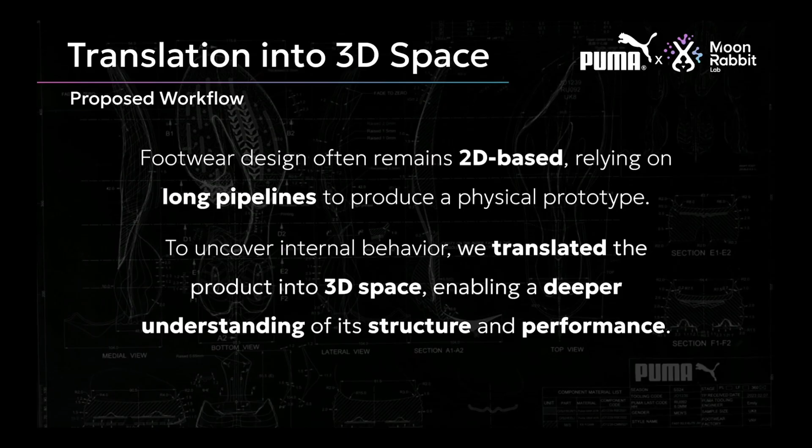I don't know how many of you have worked in the footwear industry, but every time they start from 2D. This was quite different for me, coming from an engineering background; starting from 2D was weird. So we wanted to start with a 3D approach immediately, to start seeing digital mock-ups, creating prototypes, forms, shapes, design, and so on. So we proposed a way to translate the previous model into a 3D design space and create characteristics to understand the structure and performance.

Besides that, we wanted to bring in the part that we master, because I've spent six years working only on simulations of hyperelastic materials, soft foams and rubbers. So how can we create a multi-material simulation that enables the understanding of footwear in general? We can observe the physical behavior, like an X-ray or a macro vision of what's happening in maybe 250 milliseconds.

So we proposed a workflow. This is really interesting, because for us it's always about the workflow and how these workflows not only apply to footwear but can extend to different industries. So how did we do this? We started by collecting data. Puma has a NITRO lab in Boston with a really cool setup where you can get plantar pressure distributions, treadmill videos, and ground reaction forces.

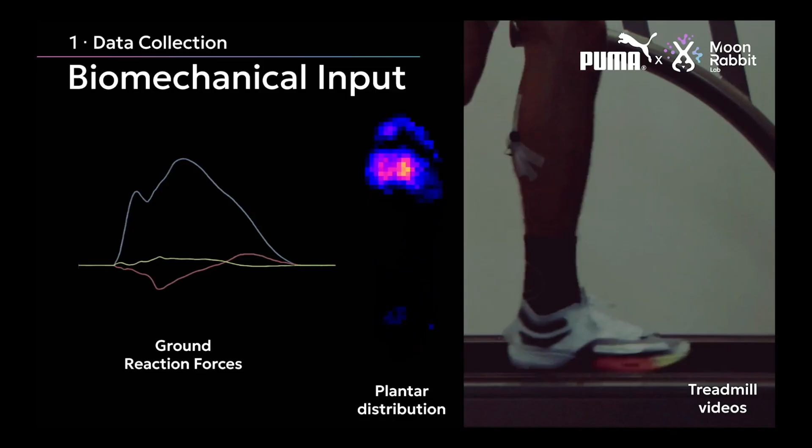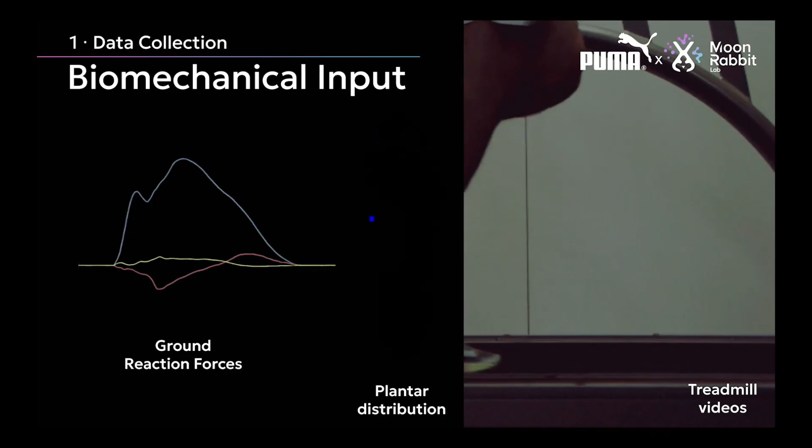So how can we put all this information together? In the end, it's data trying to talk with the product. One way to do it is by experience. The other way is to put all the data in a design space. So we started creating a huge database, inviting runners and adding more information to create enough statistically valid data that could help us lead the design.

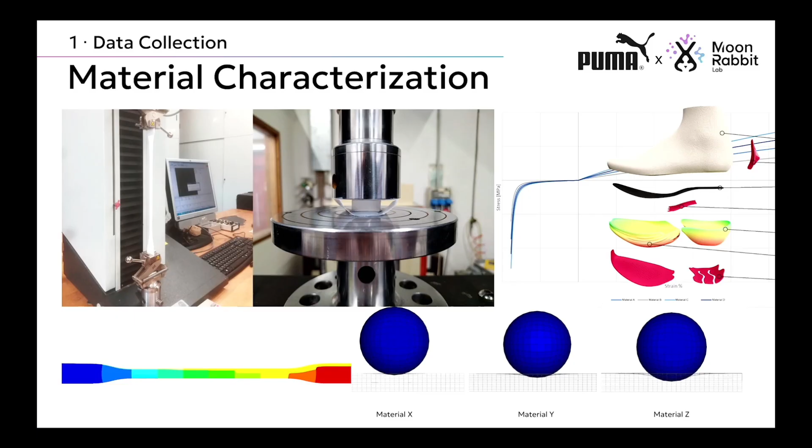One of the main things I believe is important in design engineering projects is material characterization. You need to know what you are working with: whether it's hyperelastic, plastoelastic, or carbon fiber, and what the considerations are. You need to understand the tension, the compression, the actual behavior, and so on. This was really critical for us to set up a correct simulation.

And then we needed something or somewhere to put all this information in a 3D design space. So we got our inputs, then we created our computational data processing. So this is the space, or the black box, or our area in which we will start transforming data into 3D. And how can we visualize it? How can we actually work with that?

So this was the challenge for us, but in the end we started creating our own tools, because custom tools in this case were one of the key elements for creating what would be our performance area. We started creating clusters in Grasshopper with different definitions. We created our own API for FEA. We started creating different definitions and workflows for data visualizations, and this helped us to loop faster and faster between one area and the other.

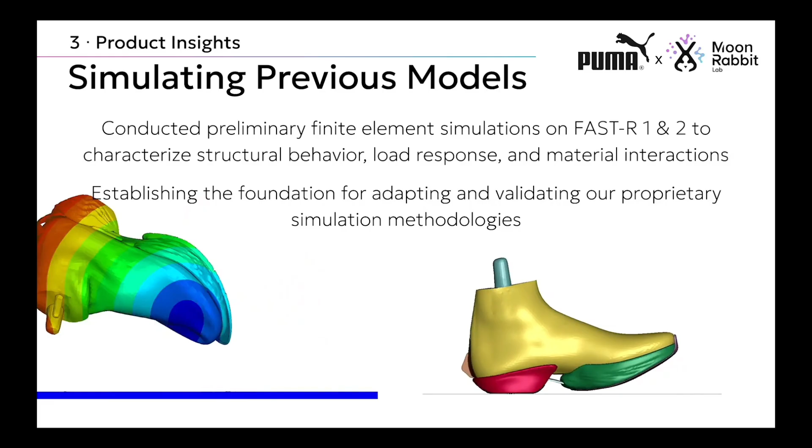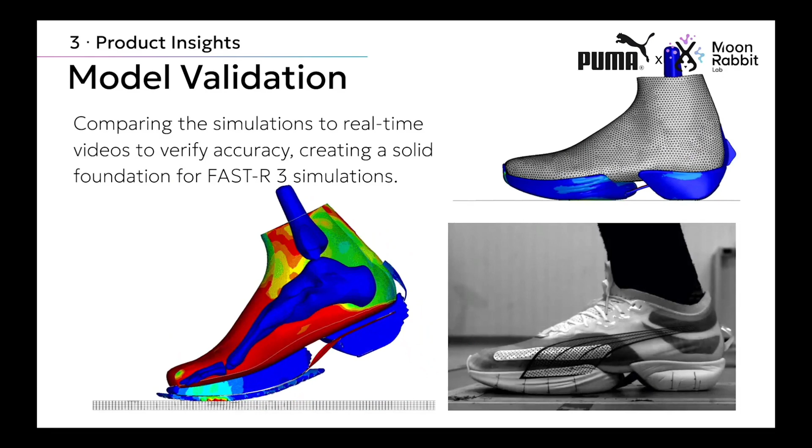So simulating multi-material physics was not an easy task. At the beginning it was really complicated to get it right. You need to understand what are the correct balances of forces, the timings, the materials, and so on. But finally we got it correct. And this is part of the success of this project, because we were able to validate the digital models with physical testing. So we knew the deformations, we knew the strains, we knew the forces, and this helped us to move forward believing what we were doing was correct.

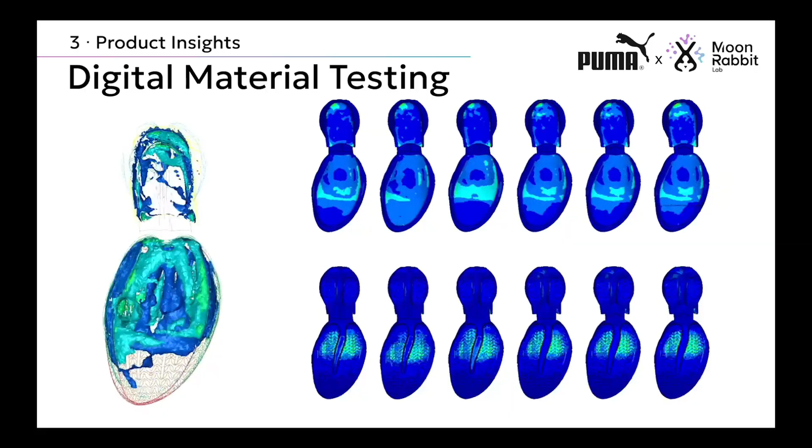So we started mapping. Digital simulation enables the creation of different geometrical changes at the same time that you can vary materials. So you can test different types of foam, different types of rubber, different types of internal plates, could be PAs, carbon, etc., and have everything digitally tested. So we proceeded to do that. We created a material testing with the same model of the Fast-R 2, and we started learning which materials were having the best response, the best timings, the best energy absorption, the correct bendings.

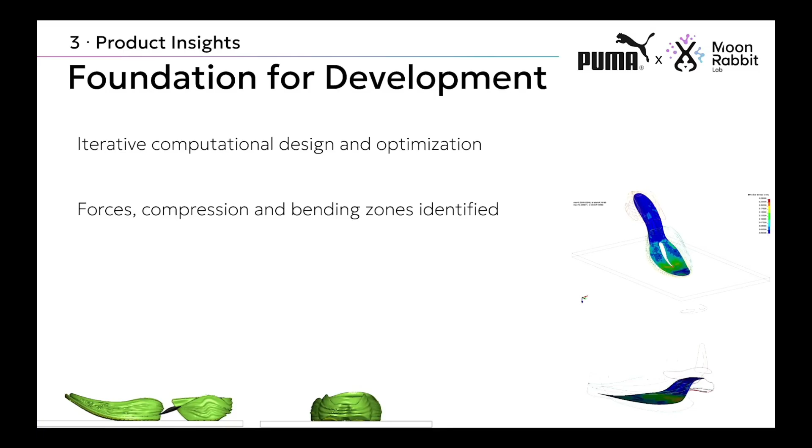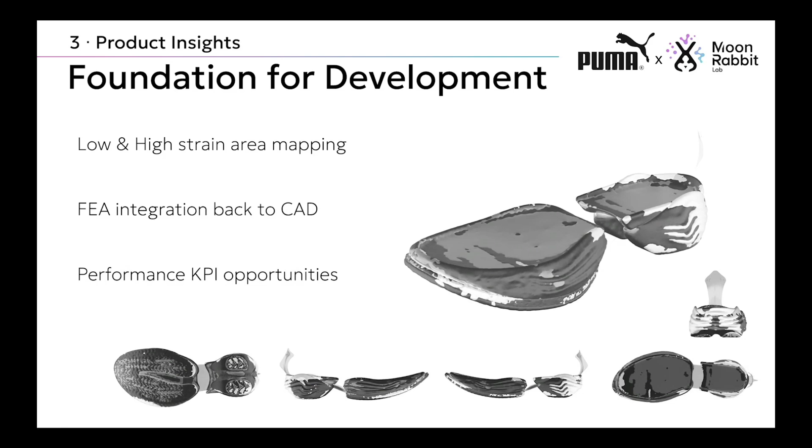And once we understood all of that, we put it all together in a way that we can actually use the information. So we started creating heat maps, volumes, and our own KPIs in order to understand how we can use this information to make an informed decision in design.

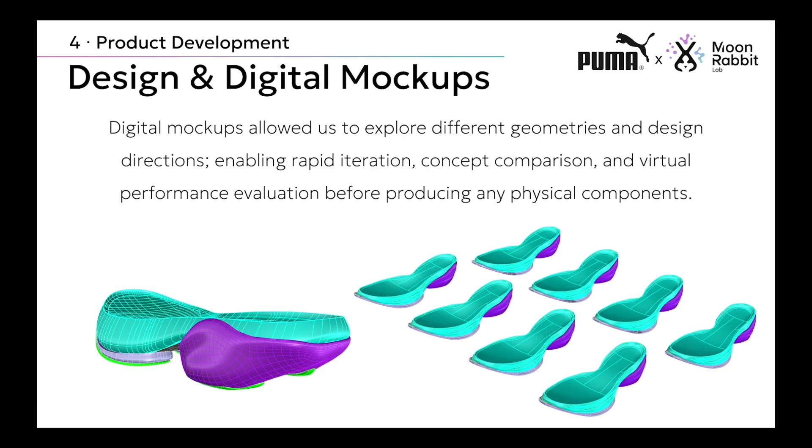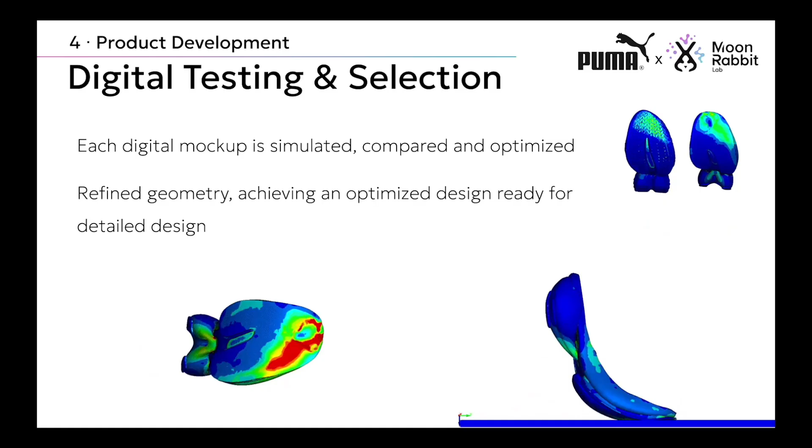The next step for us, I think, was the digital mockup. Digital mockup was really important for us, because of the possibility to create fast prototypes in terms of days, maybe weeks, test it, and go back and forth once again. So that was the key element that we started implementing. Once we had the information from the Fast-R 2 guiding the design of our digital mockups, we were able to also simulate those digital platforms. So we could understand if our designs were making sense or not, and where the areas of opportunity were to improve compression, improve stress, or better guide the directions of forces.

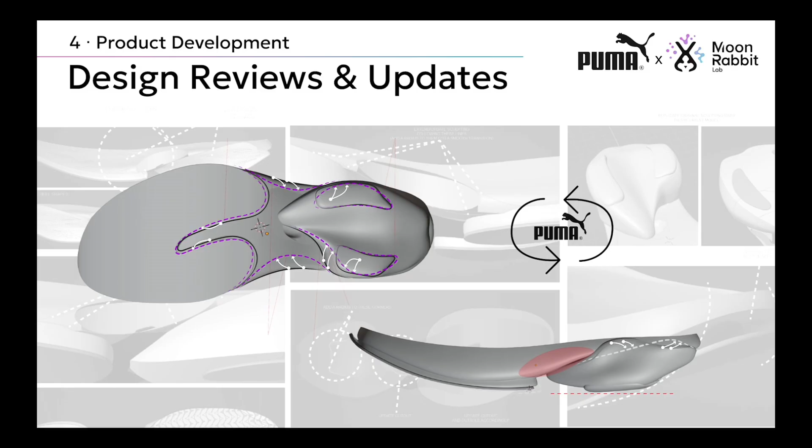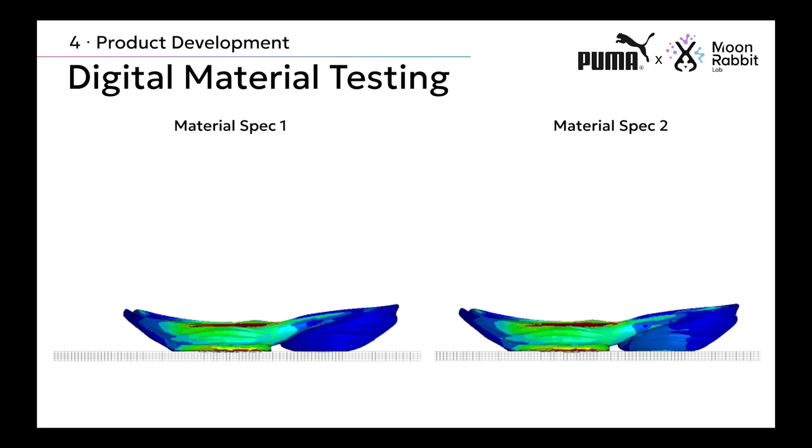Along with this, it was always important to have the DNA, or the design part, inside the project. So this was a key feature in which you start creating the mockups, but then you start aligning the design. So everything comes together: the engineering part, the design part, and the production side. Little by little we came up with the first sample design, and then we started iterating between different material specs. Here we were under the microscope, literally. We started creating different specs, different forms. The changes were minimal, but we knew that we wanted the maximum performance. So how can we actually achieve the best performance in each piece?

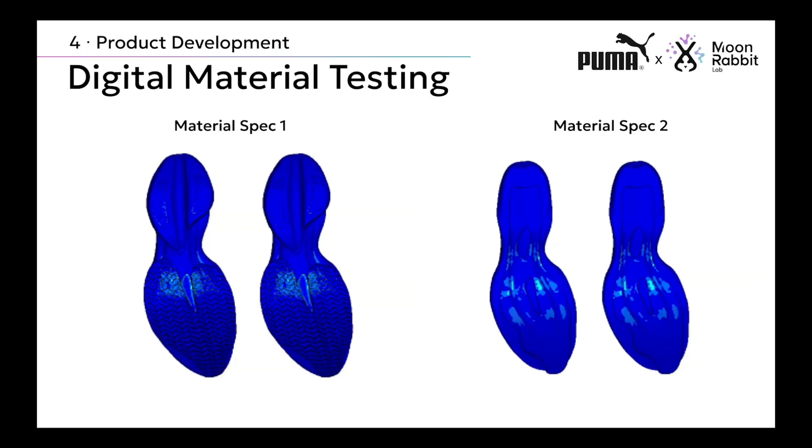What was the correct material to enhance the performance of the carbon plate, in order to guide the energies in the correct directions? What were the foams? What were the rubbers and the patterns inside the rubber that enabled the best traction? So all of this was possible to be tested through simulations and digital testing.

One important thing for us was always the weight, but at the same time keeping the DNA of the brand. So that's why we always kept in mind how the shoe is constructed, what's the storytelling that is coming through, and how we can actually create a shape or a design that follows this.

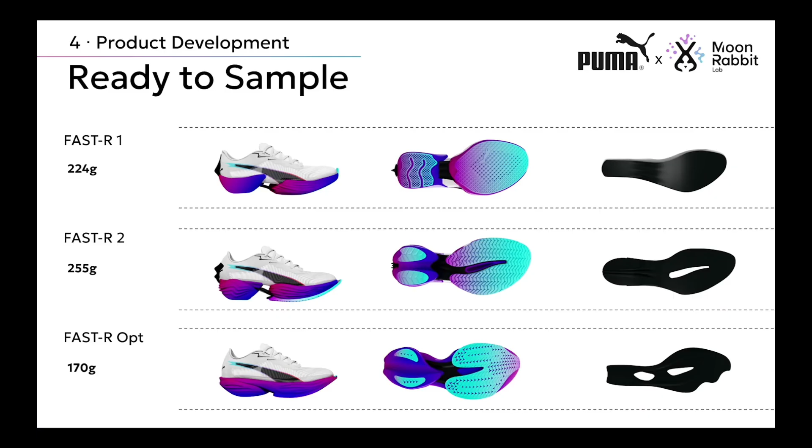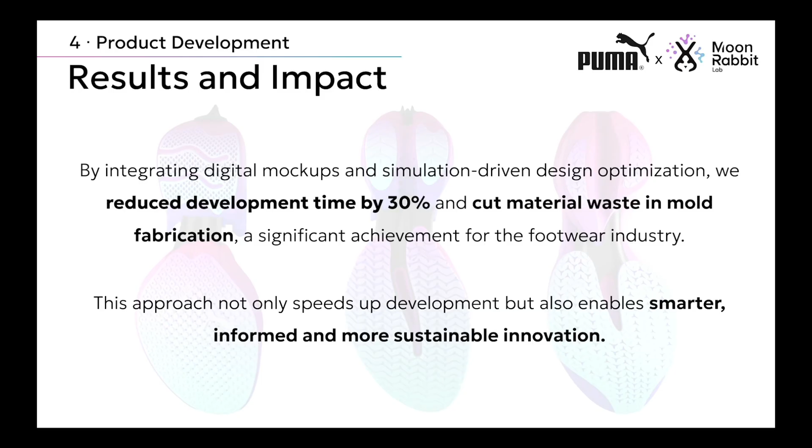So this was the first sample of the Fast-R 3, or the Fast-R development, in which we could reduce the development time by 30%. We cut a lot of material waste from molds, making, and fabrication, because we did everything digitally tested. At the end, of course, we have to have physical samples. We need to go back, test those physical samples, and understand if they make sense or not. But this helps us to make more informed decisions when we're creating design.

This is the one where we got the first prototype. Then the next part was testing and testing and testing: wearability, performance, and whether what we were doing digitally actually made sense in the physical world. And then we saw that it was correct, and we were in a good direction. We had around 95% correlation between what we did digitally and what was physical.

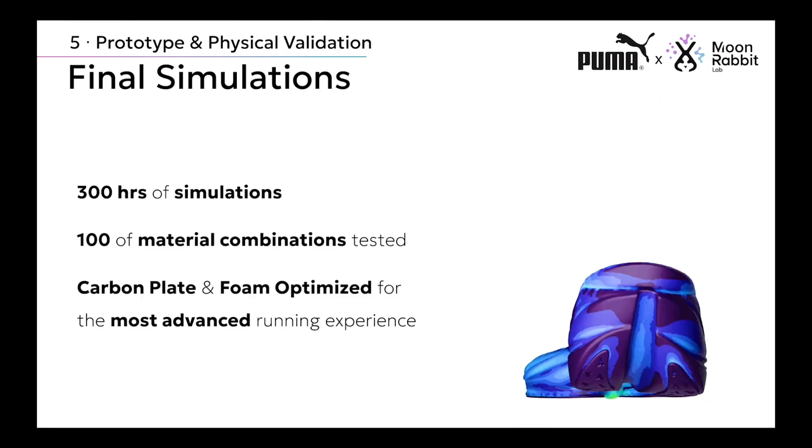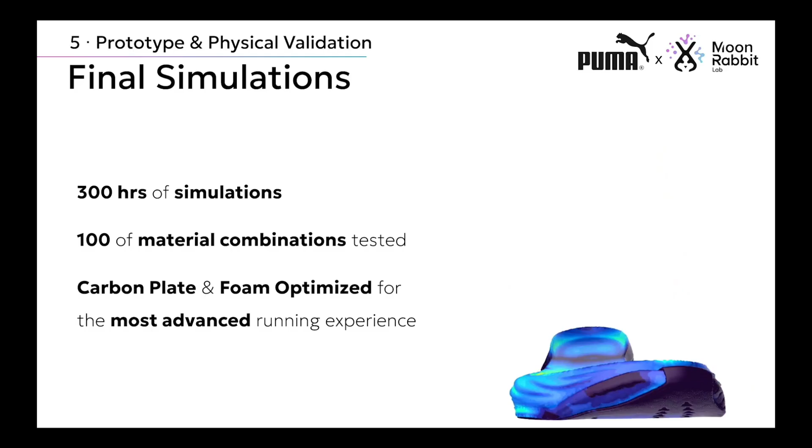And then from there, we started doing detailed design modifications. With the design modifications, we always finalized with a simulation to make sure all the designs and details don't change the performance of our shoe. In the full project, we spent around 300 hours of simulations. We did more than 100 material combinations. And we got the carbon and foam optimized to have the most advanced running experience.

Something that is a highlight for us was the importance of the carbon plate design. In the carbon plate design, we tried to understand and analyze each of the layerings inside those carbon plates, using all the data that we got from the athletes, in order to get the best configuration possible of the layerings. So this is also one of the big achievements, because in that way we could actually test what directions, what angles, what layering, and at which moment we need to do it.

And finally, thanks to the machine of Puma, they were able to put everything in motion. They started creating all the color, material and finishings. They started testing it with different influencers and bringing people to the lab, testing the finalized project. And then finally, we got it right. And it was presented thanks to Project 3.

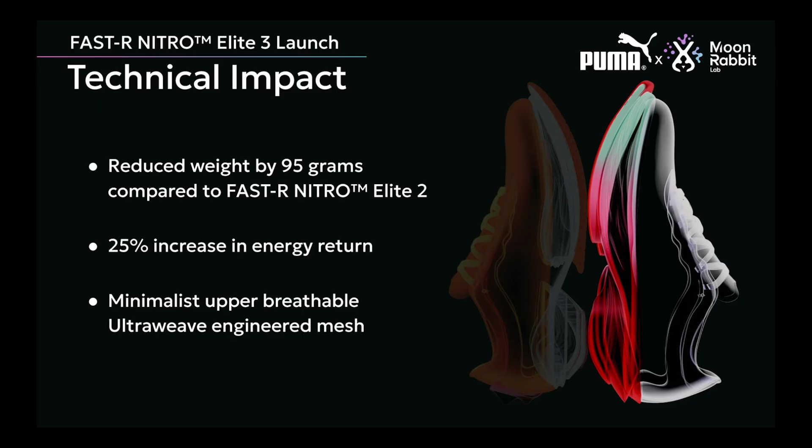Fast-R 3 was launched at the Boston Marathon. And it was a huge thing for the footwear industry, because for Puma and for us, it was a reduction of 95 grams from the previous tooling, while having the same performance. We increased energy return by 25%. This is also thanks to the new NITRO foam, which is TPU based, and the minimalistic upper. We will have a sample of the shoe there, so you can also see how light it is.

The performance impact of the Fast-R 3 is that 237 pairs sold in 3 days. At the Boston Marathon, thanks to Project 3, 30 of the 90 marathoners that were part of this project broke their personal record. And 4 athletes were present in the first 20. Amanal Petros, this is one of the craziest highlights. Amanal Petros won a silver medal in the men's marathon at the World Championship with a photo finish. This is something that never happened before. By 0.03 seconds, he got the silver medal.

So it was a good achievement for us to see that the shoe is actually helping athletes to move forward and perform better. Another highlight is, I don't know if some of you run and know how difficult it is to go below a 3-hour marathon. So cutting 4 minutes in your race is something really important. And finally, this shoe got a lot of compliments this year, and also got into the Time Best Inventions. So we are really happy to be part of this project.

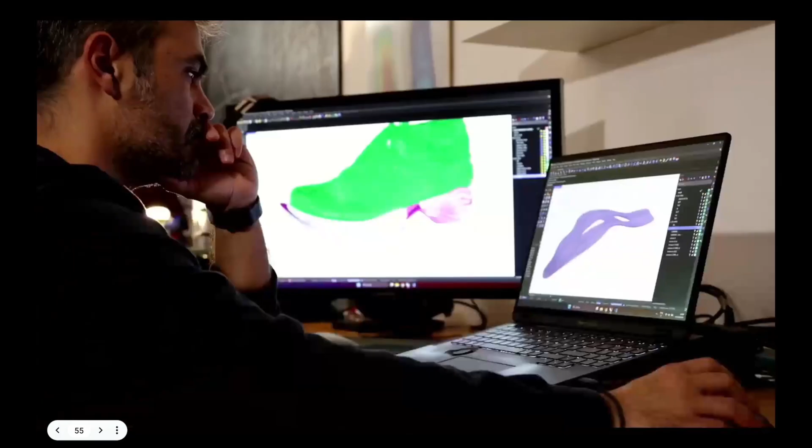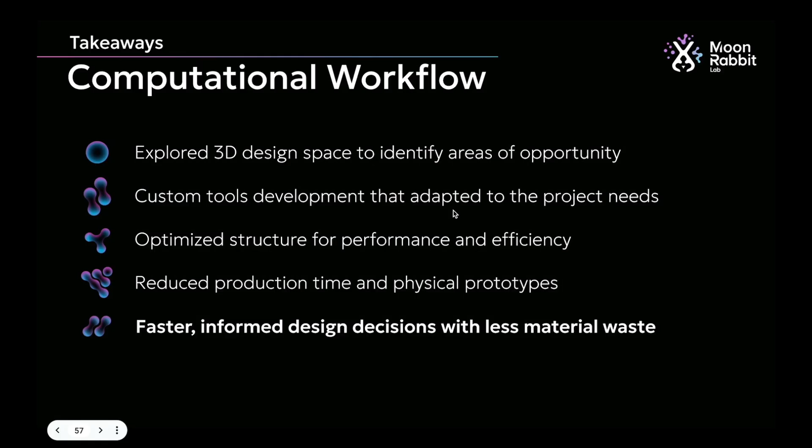So we are a team of 5 people in the studio, so we are really small, but we are doing great things trying to push the future of computational design. So the takeaways: we explored the 3D design space, identifying areas of opportunity. We created all our custom tools, adapting different platforms to one another. We optimized the structure for performance and efficiency. We reduced the production time and physical prototyping, which is also important. And we helped Puma make faster and better-informed decisions.

And finally, the workflow is not limited to footwear. We try to scale it to different areas and find different opportunities in consumer electronics and other consumer goods, automotive, industrial, audio systems, etc. Because at the end, data is in everything. So if we have good data, it's possible to create a specific workflow to improve and create better products.